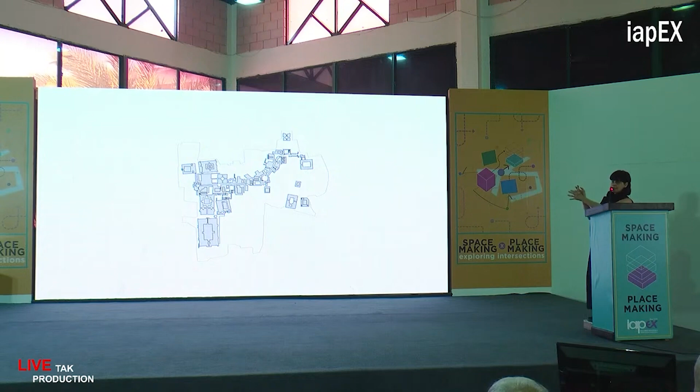500 years ago, if a city was to be built, it was like this: we have the bazaar, the caravanserai or guest house, and then the mosque. And all the residential buildings were built in a way to connect to this major zone.

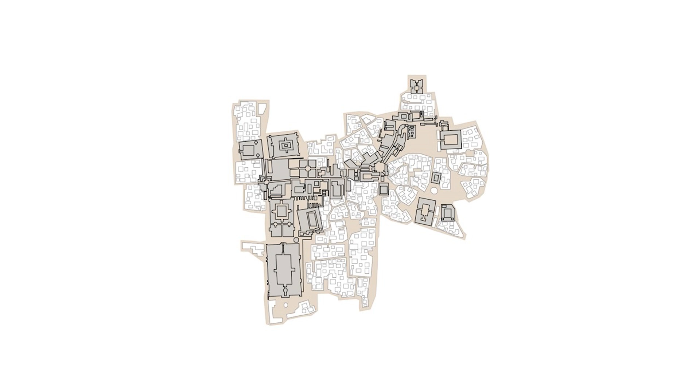And what we call an urban space was not a designed space, it was something between these built areas. The potential of that urban area was that people had this sense of ownership over it. So anybody could use it in any way they wanted - they could play in it, sit in it, hold a local market or a street theater, whatever they wanted, they could do that.

And also, going back to the culture and geography, each city could have its own shape.

But 100 years ago in Iran, distance increased, and what became important were the roads for transportation. Initially, citizens still had priority over transportation, but gradually transportation became so important, even more important than the citizen.

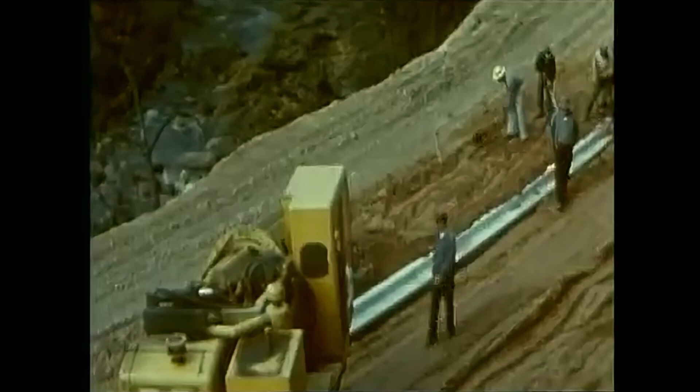So when an urban designer wants to design a city, first he has to think about transportation access. This urban design is based on transportation access, and how we can connect different zones in a city: industrial zone, residential zone, and whatever we have. Also, urban designers are the ones who decide about the location of public space.

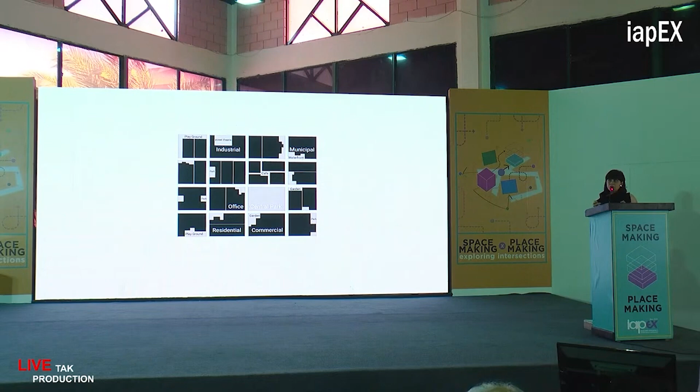Also, they decide what kind of activity should happen in that urban space. Individual taste and desire were not important anymore. Designers try to define standards and rules, so when a city wanted to shape, everyone tried to follow these rules. So suddenly you're faced with lots of cities similar to each other, and maybe the culture and geography were not that important anymore.

I wanted to compare this urban design with production. Maybe 500 years ago, we had craft production. It was very related to the raw material of that region, and very much to the taste and culture of the city. Also, any individual could order according to their own preference.

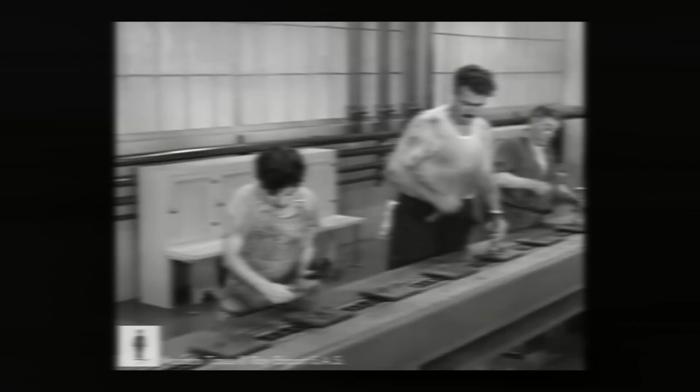But then what happened 100 years ago was that population growth and everything moved towards standardization and uniformity, and mass production happened. What was important was producing more, and the taste and preference of the customer lost their importance.

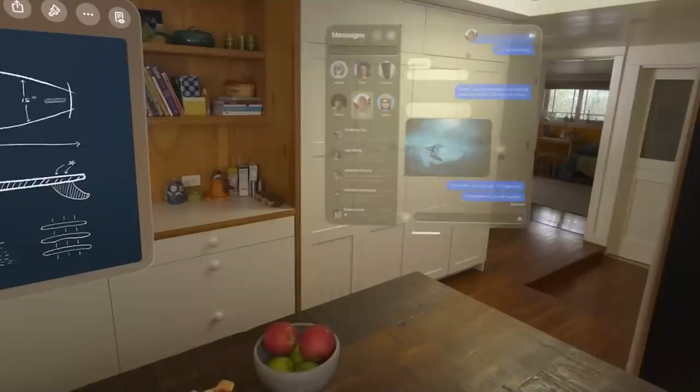But in today's world, although there is rapid population growth and we still need attention to mass production and standardization, all businesses understood that we need to pay attention to diversity, and we have to do something we now call customization.

So my question would be, if we are comparing city design, urban design, with production, how can we transfer this idea of customization into city design? How can we do that?

Back to this city that we already have. I agree we need some rules, because vehicles should have their own access. I know that we need residential zones, commercial zones, and they should have their own location, and we have this limitation of putting urban plazas, public space, anywhere we want.

I know everything, but I believe - at least I'm talking about Iran - the thing that we can do, we have some solutions. One could be designing, as urban designer, a free platform so any individual could find their own answer to their own concern in that public space. Or maybe we can engage people to involve in the process of designing these public zones.

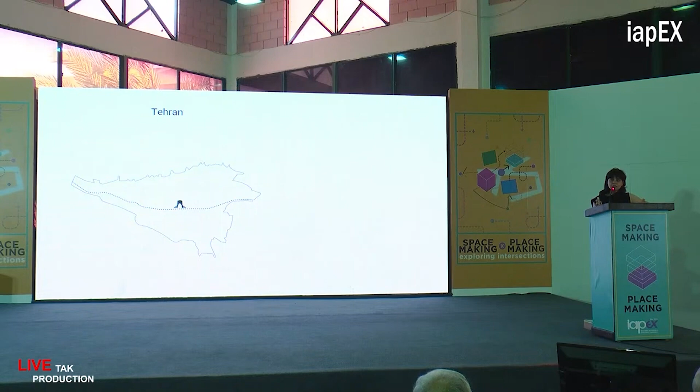And even if a good project happens in their neighborhood, they don't believe that this project is to answer their needs. They think it's just for responding to some other goals, like political goals. This mistrust is very dangerous for a city, I believe, because then people start to not use the project, and the project becomes abandoned, or even maybe they do some damaging, something like that.

So it costs a lot for the city. So we were thinking how we can change this situation. The answer would be: let's involve people, let's try to respect them, let's create some atmosphere where people can talk about their own desires and everything.

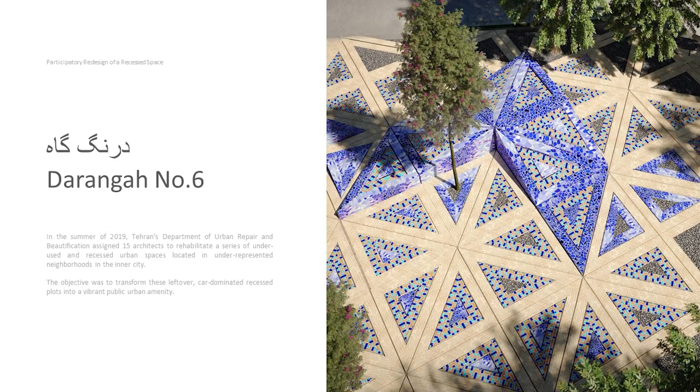Okay, I want to start with this project, Darangah. The municipality gave us this site and asked us to organize it.

In our first site observation, we thought we had found the solution. We said, okay, there are some cars here, we have to remove them from the site. And we said, okay, we have greenery in that part, so it's very good - it's a positive point of this site, so let's keep it. Then we decided to make this space a gathering space, so everybody could come and spend time there. So it was all in our mind that this was a good solution for the site.

But thank God, we said okay, let's go and ask the neighbors what they want too. At first they were very angry because they looked at us like we were from the mayor's office of Tehran. So it was very hard to start communication with them, but then they started to talk to us.

And it was very interesting, the result. They said, here we don't have any safety, and we need our cars beside our houses, so you cannot remove them. Then they said, see that green area - it's the place for drug dealers and addicts to hide drugs, so you should remove all the bushes, but you can keep the trees. And then they told us there are some immigrant workers here, and we don't want this place to be a gathering place for them - if you do that, we will just demolish it. So it was a very important lesson for me, that I don't know anything.

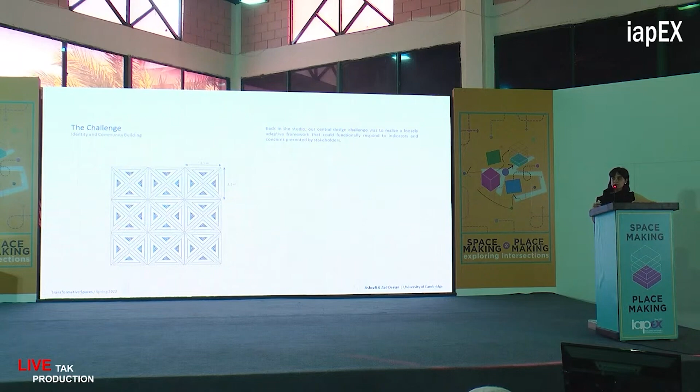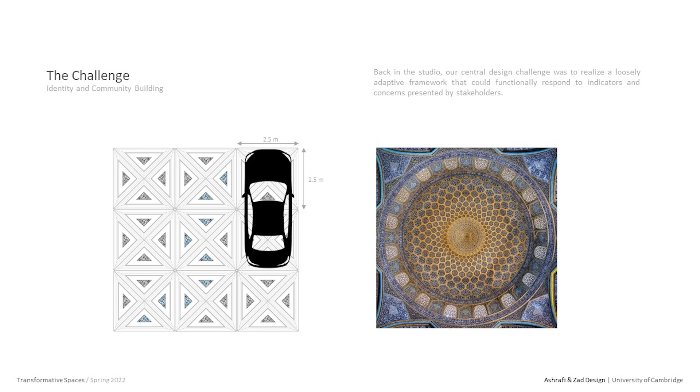Okay, so after we did this data collection, we decided to choose a modular geometry that could easily answer the different functions we had on the site. We also wanted that geometry to become very familiar to the citizens, so we tried to choose a Persian geometry. And here is the site, showing how that geometry organized everything.

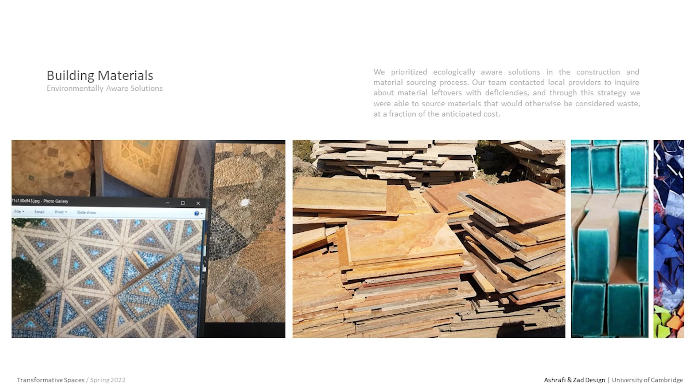As you can see, we had to put the cars there, and also we removed all the bushes and added some trees. We also had a few benches, but not too many. That place became a good spot for children to play and women to gather. But that's not the whole story, because we also had a limited budget, so we were thinking how we could use leftover material to help decrease the budget.

You know, usually factories have lots of leftover material, so I suggest everyone go and have a look - you can find lots of beautiful material you can use in your own project. We decided to do that, and the only cost was transportation.

Look at the geometry - in that geometry we have some small triangles, about 183 of them. So we had this thinking: okay, let's participate people in construction too. Maybe we can ask them to make these triangles with broken tile. So we set up a one-week workshop and asked neighbors to come and join us to make these triangles.

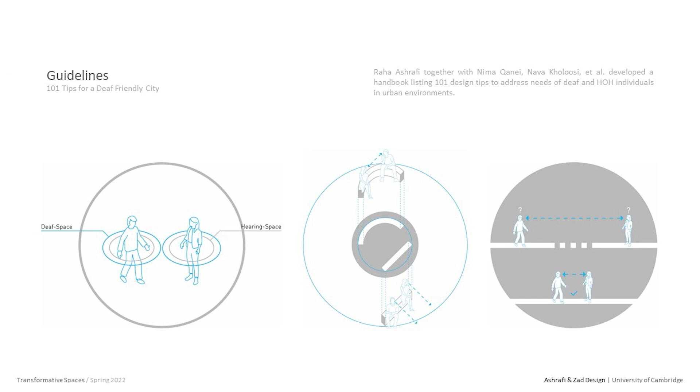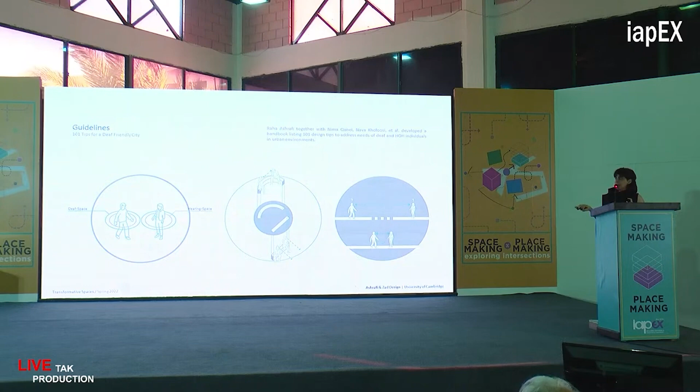One of the studios was about a deaf-friendly city. I had lots of research with students, and we published a book with lots of standards that show how a city should change in a way to respond to HOH individuals and deaf people. It is easy to download, and you can have it for free if you want.

Then this project came to us, and it was very interesting that it was exactly beside the Deaf Community Center. So we were thinking, okay, if we have to respond to the neighbors' needs, let's also consider some standards that make this park a deaf-friendly park.

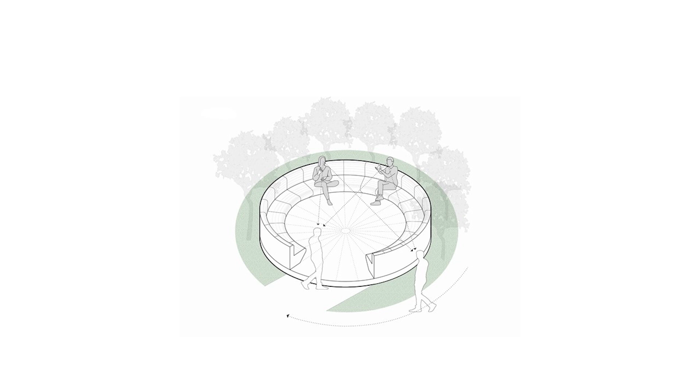It is the first deaf-friendly park around the world. This is our proposal for that park. What are these standards I'm talking about?

For example, about the sitting area, they have this golden dimension that everybody—because all the information comes from their eyes—the distance should be in a way that they can see each other.

Also, it is very important in which direction people enter this sitting area. And also the location of bushes is very important—nothing should block their eyes.

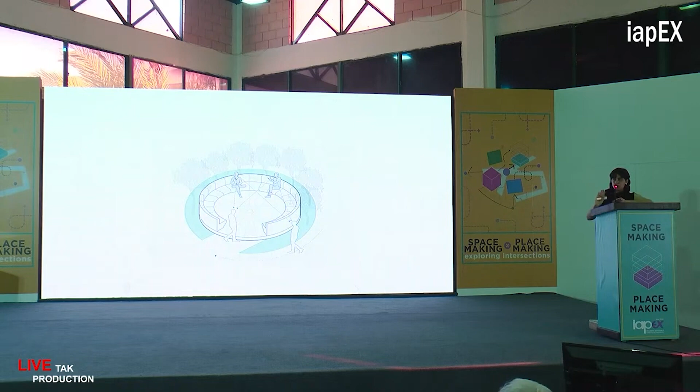Another thing is that we have to control the natural light. So if you want to put the shelter, it should have enough height to decrease the contrast of the light, and the shelter shouldn't block the eyes again. And here is the result.

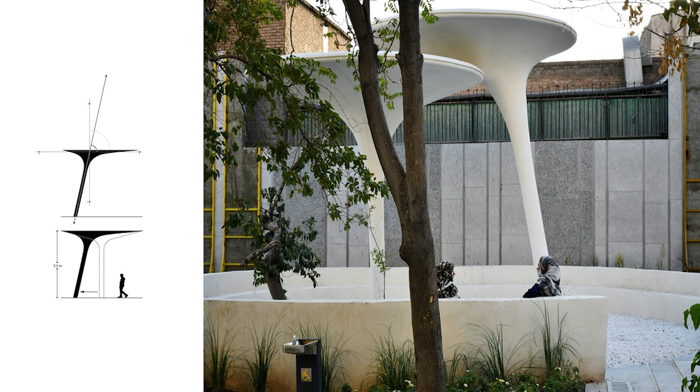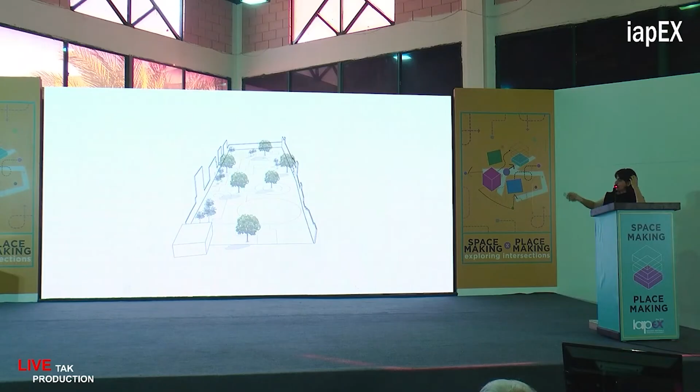Also we had some existing trees on the site, so those locations helped us rearrange the geometry of the park. And we decided to bring this green area to the wall.

It is another view of the park, and a section of it.

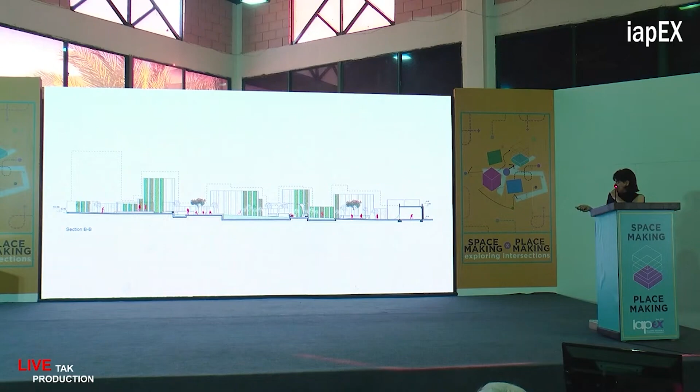Also, because we wanted to manage water usage, we tried to choose just native plants. Another thing that we thought would be a good idea was to just use herbal medicine plants in that park, so any citizen can use them.

You can see how children play on the side, and you see this wide way, because when deaf people want to communicate and talk, they need enough space to move their hands. So it should be wider than usual for them.

And it is not the whole story. We asked the deaf community to come to the park and give us feedback if they had any opinion.

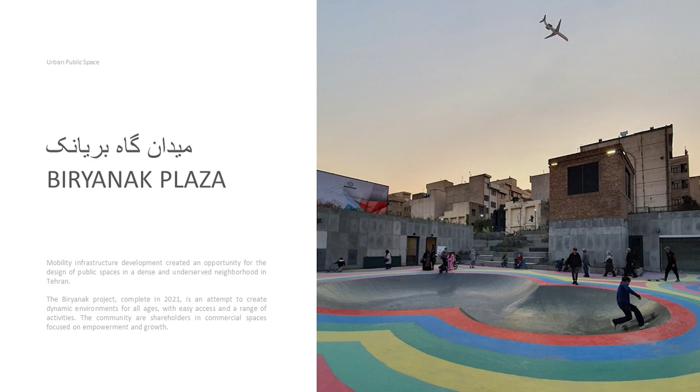Okay, next project is Biryanak Plaza. This is the site. The site is beside a main highway of Tehran.

It is a movie—can you play it or not? So you can see at east we have this highway, and at west we have a residential zone. It's a low-income neighborhood.

When the client gave us this project, they said that they already had some other project along this highway, but it is abandoned—nobody used it.

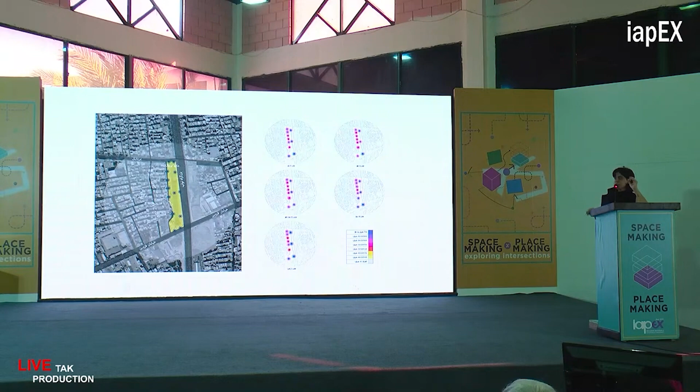So we understood that maybe one of the main problems of the site is noise pollution. So we started doing this data mapping for noise during the days, and we found some solutions for how we can control the noise pollution.

We had three answers: one, if we sink the site; two, if we sink the road; or three, if we make a boundary between the road and the site. This boundary could be planted as well—and which kind of plant would be good for this boundary?

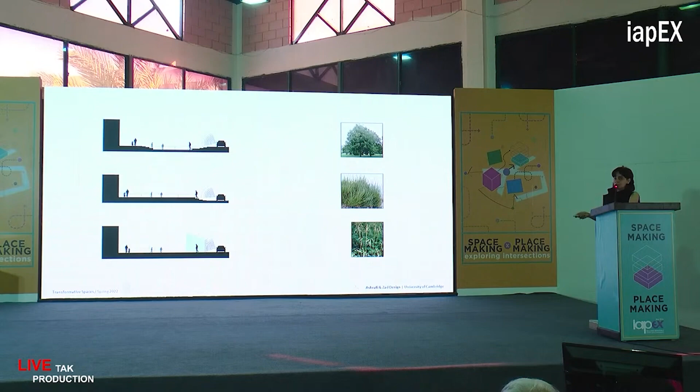This was the site when they gave it to us, and already it had this difference in height, about 4 meters. So we thought it was a good chance for us—let's keep it as it is, and let's add another solution: this planted boundary we want to put there.

So here is a section of our solution. You can see how this design could control the noise pollution.

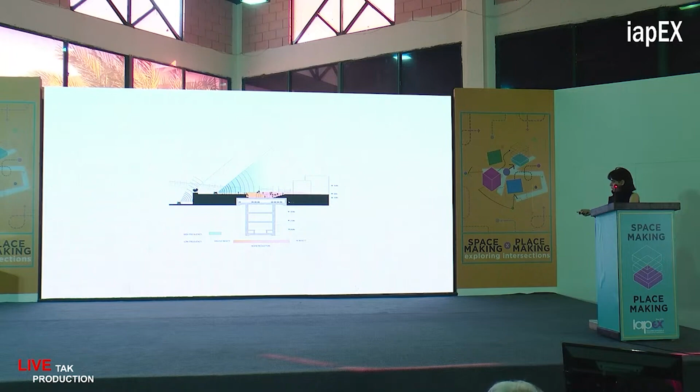It is a section of the site. So we had this idea that the site should have this boundary to the highway, but also should give this feeling of welcoming from the neighborhood zone. So we add stairs in that part. But then we have to keep this plaza safe. So what could be the solution?

So then we add these retails, because they asked for some retails as well, but then we try to organize it in a way that this retail could somehow be the eyes to the site too. And also we thought that because the site belonged to the municipality, maybe it is a good idea to rent these retails to the neighbors there, so then they could have their own job there, and it is a low rent retail, so it is a good chance for them.

And also we have lots of users of the site, because we have passengers from the metro, and also we have local neighbors there, so they can use that area too. And also we talked to people, children, about what kind of thing they want to have. And so we had lots of meetings with stakeholders.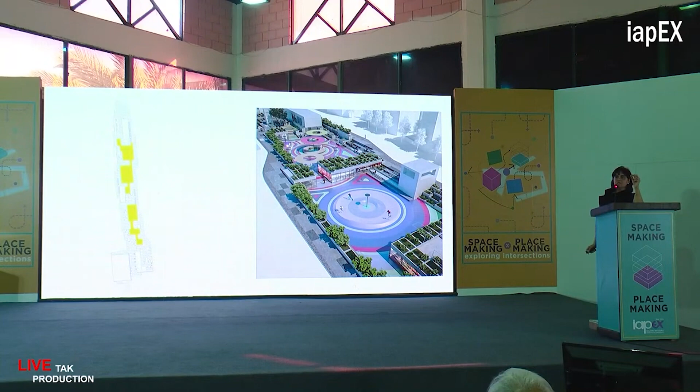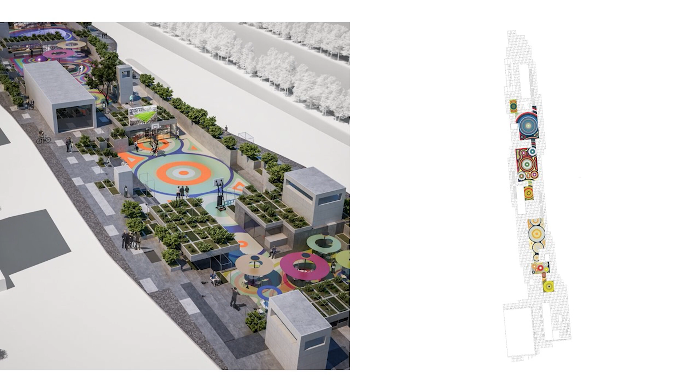And we reached this solution. We have 5 courtyards, each of them responding to one group and responding to one activity there. And you can see this yellow area are retails. And then we try to make the plaza more colorful, and all this pattern of colorful things you can see is responding to the function we decide in that plaza.

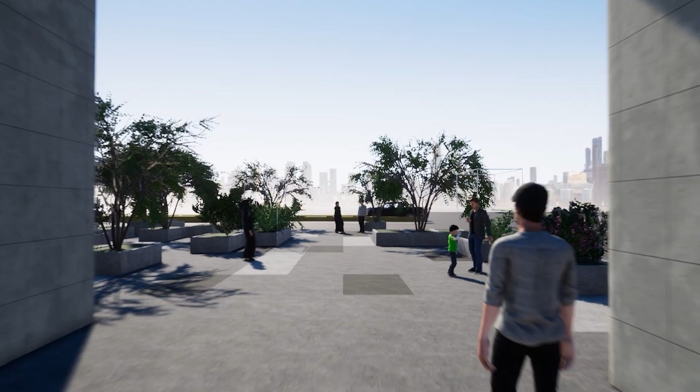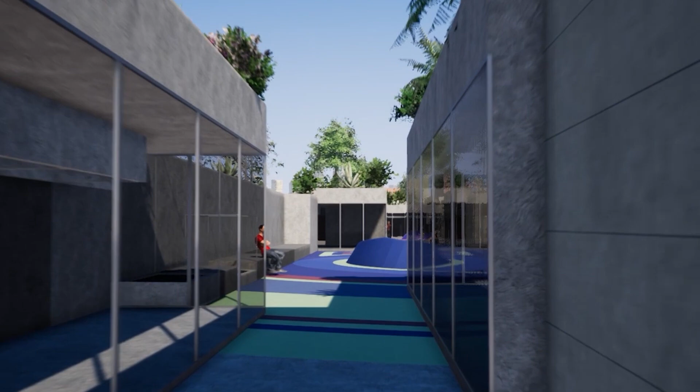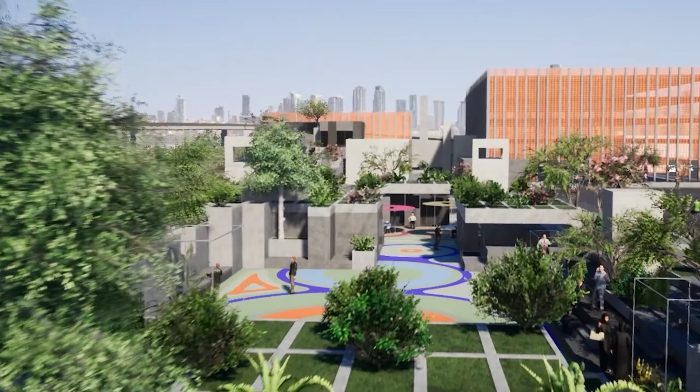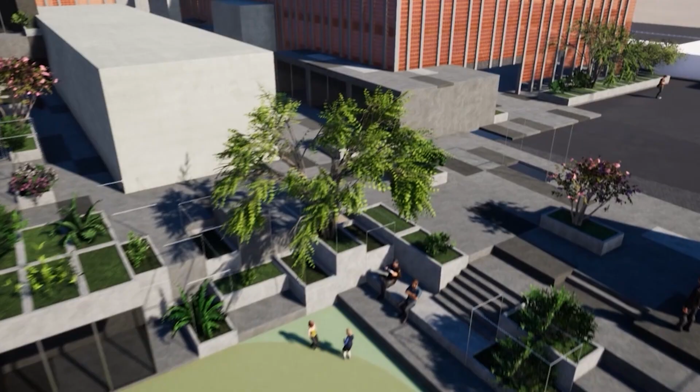And this is an animation we made at first. And this is the final result.

Okay, back to this question. I believe from my heart that we have 8 billion people around the world. We have 8 billion experiences, different experiences. We have 8 billion people with different backgrounds, different fears, everything. So I can say we have 8 billion unique people around the world.

So imagine each of them could be your client. So if you give them this chance to be listened to, and create this chance for communication, and try to answer their concerns, then you can have a unique project, because it belongs to their concern.

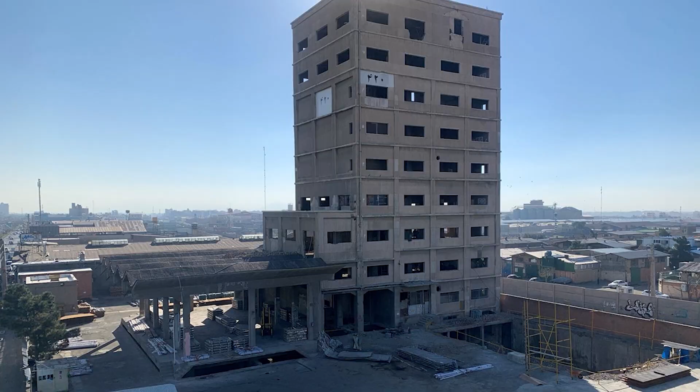So because of his vision, he had to buy a land and ask the architect to design for him. But why did I say he is very clever? Because instead of buying a land, he bought this. It is an old factory, I guess it is 80 years old, maybe, and it is in the industrial zone. And as you can see, this is the only high-rise building in that site, so it is already a landmark. So instead of buying a land and asking a designer to design it, it is a very great decision.

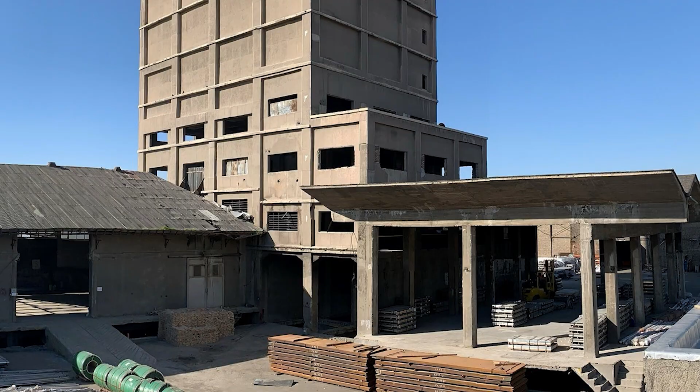If it is the east part of this building, our solution was this: so this lower level is very much heavier, and it is very related to the context, but then the higher one is transparent, showing the activity inside it, and between these two parts is a boundary which is green. And inside the building, that green area works with the restaurant, cafe and gym, which is very related things.

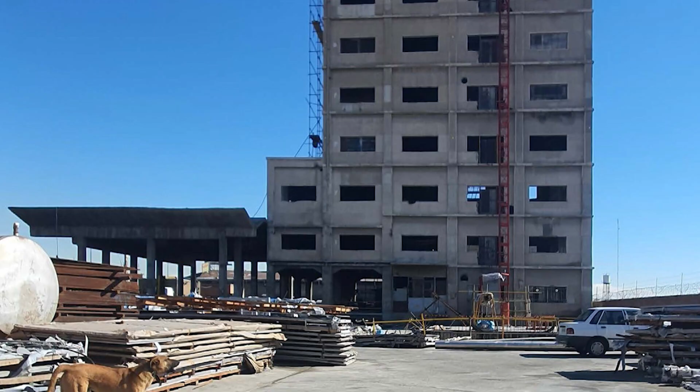And if it is the west part, our proposal was that. And it is another view, you can see. So what he wanted to have was some offices on the transparent part, gym and restaurant on the boundary side, and all this heavy part is showroom and industrial offices, something like that.

And we have a storage of its material in the yard.

Okay, it hasn't finished yet. So this is the building, and you can see the location. On south we have the railway, we have highway on north, and even after that we have the airport on the north.

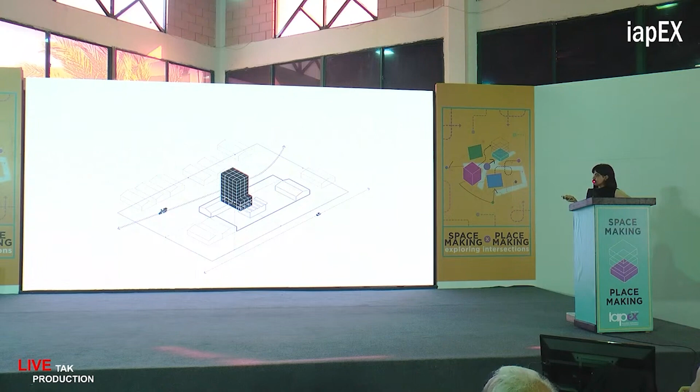This building has these silos inside it. About 3 levels are covered, filled with mass concrete.

When we entered this project, the client was demolishing this mass concrete because he thought he needed some space for his functions, and he didn't have enough space because in each floor about 70% of that floor was covered by this mass concrete. So that is where we started to have this dialogue, this conversation.

The client talks about his concerns and we listen to it, and instead of fighting him, we try to understand him and find a solution.

So our solution was, let's design the cutting part. Instead of cutting everything or demolishing everything, let's design this demolishing part. That was our idea.

So then we give him the space he wants. We keep the story of the building, and also we can somehow increase the quality of that space, but with the way we want to cut it.

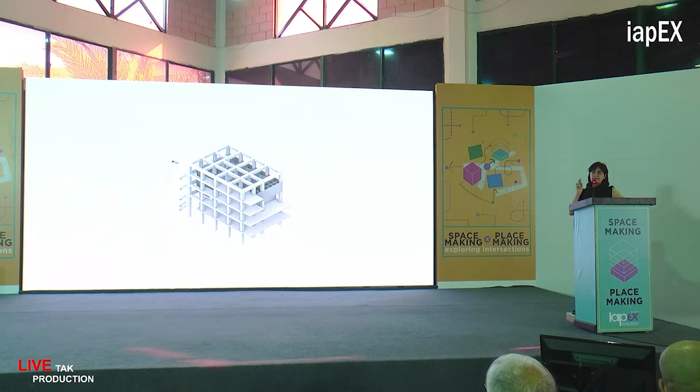So this is a project inside another project. It took about 8 months for us to finish it.

I said before that this project is more about conversation and dialogue. So one of our major problems was how we can make a map, how we can translate it in a way that the contractor understands it.

And which machine we have to use, in which location we have to start, from up or from down, from the bottom, and where is the benchmark. And this, where is the benchmark, is very easy to say, but it was very hard to find.

So we decided to imagine it as 4 parts, and it has lots of... I don't know how to say it in English. We did lots of things to find some points, and you can see how we did it.

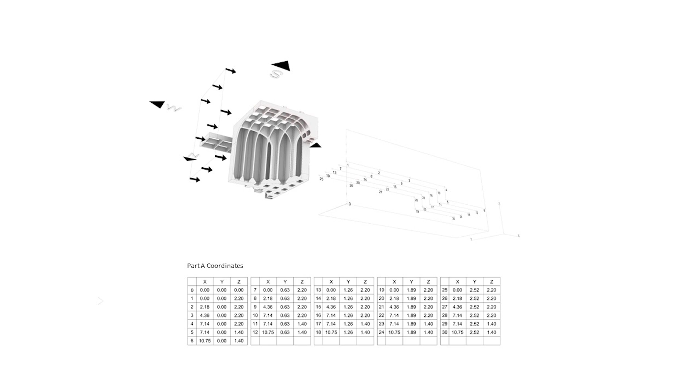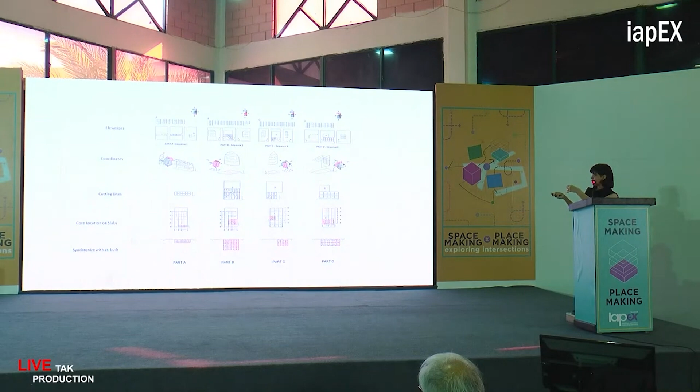I don't want to go through all of them, but these are the maps or plans we created. So if we want that red curve, what we did first was choose, I put some points on the wall.

Then we start from up, because we need some space to put the machine that can do this cutting, and one by one, we went down.

During this, we had to do reinforcement work as well for the structure, because before that, it was working as a structure as well. So if we wanted to cut it, we had to have a solution for the structure.

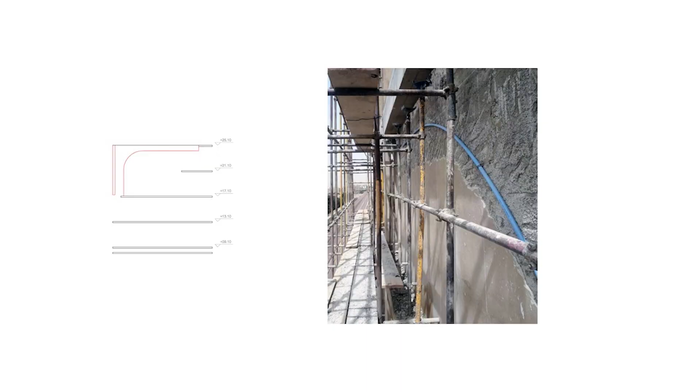And this is the way we did it in real life. This is the final result after 8 months.

You can see how it somehow gives you the idea of Iranian geometry, something like that. And this is the result.

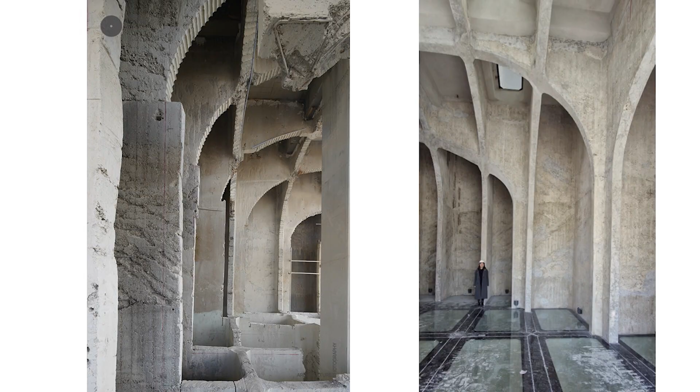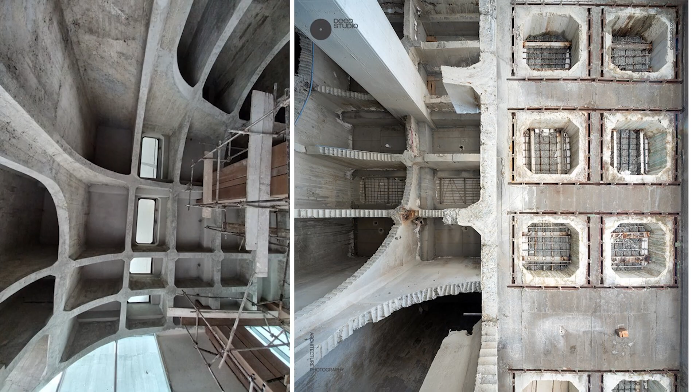Yeah, the building hasn't finished yet, so sorry because of the dirty glasses. This is another view. And this is the result.

We also had some proposals about interior design. We wanted to keep some of the concrete parts, and also because his business was very related to steel, we used some steel in the interior design.

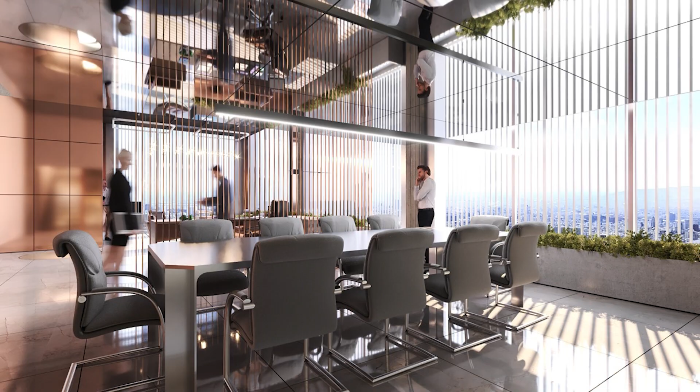As you can see, we have some circles there, because it is somehow related to the story of the building, so we tried to keep it. And you can see again the entrance of the silos that we kept.

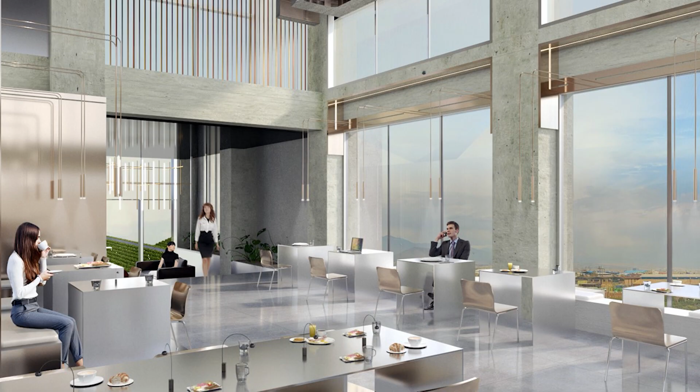So the building, as you can see, is already finished, but the interior still needs some work to do.

Back to this question: still, we can have our own definition about an ideal family. But the thing is, when I came to Pakistan, I found a good example of an ideal family, and I think IAP is one of them. Thank you.